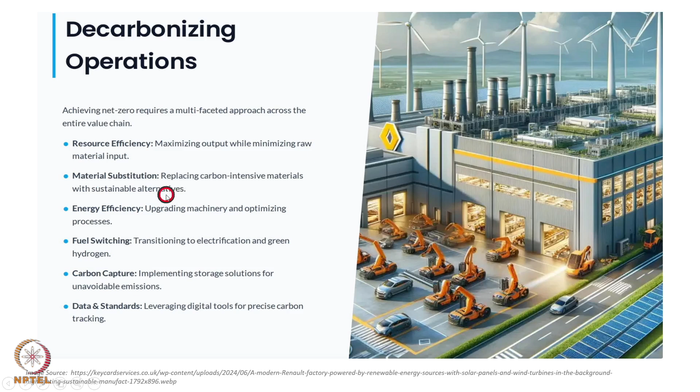While minimizing raw material input, material substitution means replacing carbon intensive material with sustainable alternatives, like we can see coal being replaced by sustainable alternatives like solar energy. Energy efficiency means upgrading machinery and optimizing processes. Machinery plays a very vital role - the configuration of the machine and the processes also play a vital role. So new concepts of machinery and optimizing the processes, sometimes we try to re-engineer the processes so that we can develop energy efficient processes.

Fuel switching is another very important aspect which companies are trying to implement - transition to electrification and green hydrogen, because as we know, electrification and green hydrogen kind of alternative fuels have the least impact on carbon footprints. Carbon capture - on the outlet of the fumes, there are technologies being developed to capture carbons, and then use these carbon captures for some other kind of processing. We can call this recycling of the carbon capture.

And data standards, leveraging digital tools for precise carbon tracking. So these are the kinds of opportunities in the industry, and any smart manufacturing industry is open to use these kinds of options or technologies to minimize carbon footprints, or to minimize the impact of carbonization due to their operations.

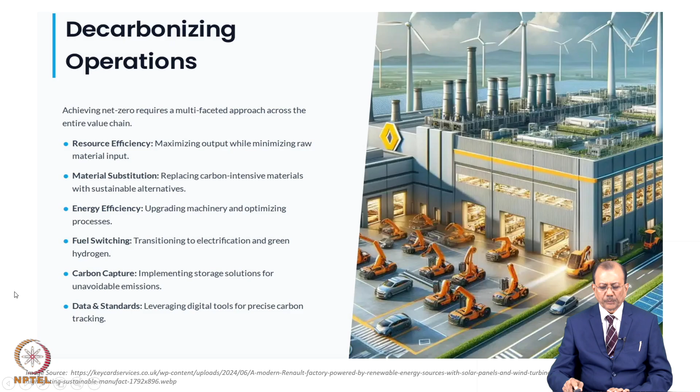Then we have opportunities in terms of challenges and opportunity regarding supply chain resilience. There is opportunity for end-to-end visibility of the supply chain, so that we know where there is a bottleneck. This is also one of the important aspects of smart manufacturing - the connected value chain of smart manufacturing, the supply chain and the logistics.

And the third and very important aspect is technologies, novel technologies, which we have deliberated in other sessions of this course, but we will have a focused discussion when we discuss smart manufacturing technologies. These smart manufacturing technologies are not different from Industry 4.0 technology. They are similar technologies, but their use is somewhat different in the context of smart factories or smart manufacturing.

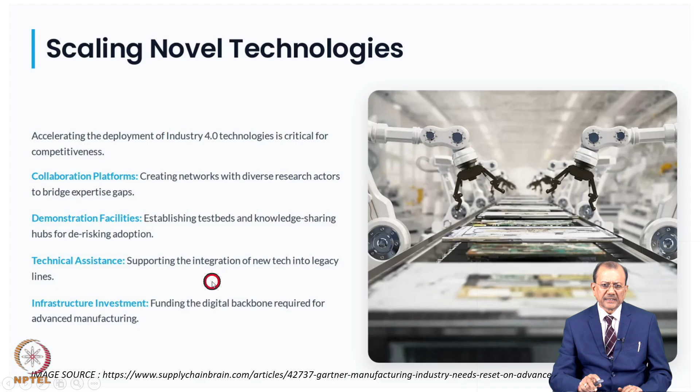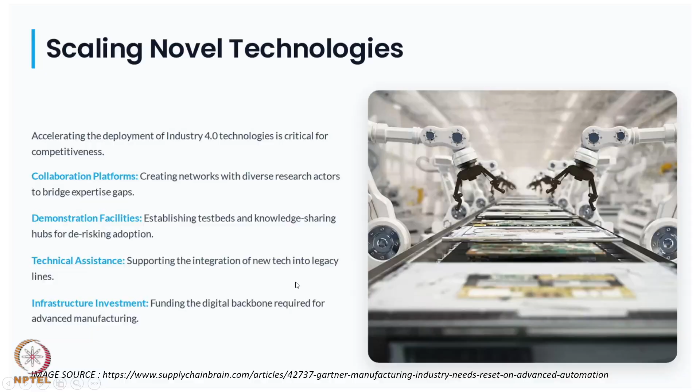Technical assistance: we should use new technologies into legacy lines, so technical assistance supports the integration of new technology into legacy lines. This we will explore in subsequent slides, I will be explaining this. Then infrastructure investment - these are the opportunities which are very much there in technology. So let us go deep down into the technology area, or technology opportunities, for smart manufacturing.

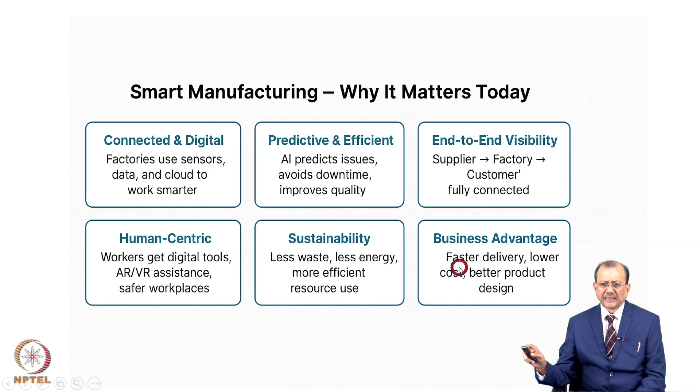This picture shows us the technologies commonly used in smart manufacturing industry: real-time data, AI analytics, connected machines, which we will discuss in the next session, automation and robotics, which we will again discuss in the next session, and digital twin, which we already discussed in the 5th session of the 5th week, showing how digital twins are used in industry. We will revisit in the next session how digital twins are used by smart manufacturers.

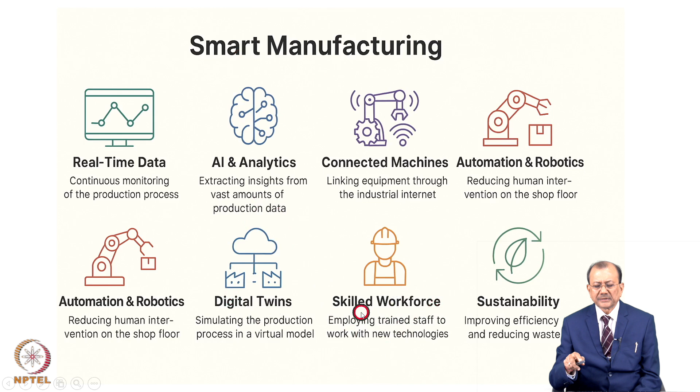Skilled workers - this is a very important area for the success of smart manufacturing, that continuous investment in workers to improve their skills, to upgrade their skills, so that they can perform in the new environment of AI, analytics, robotics, and sustainability.

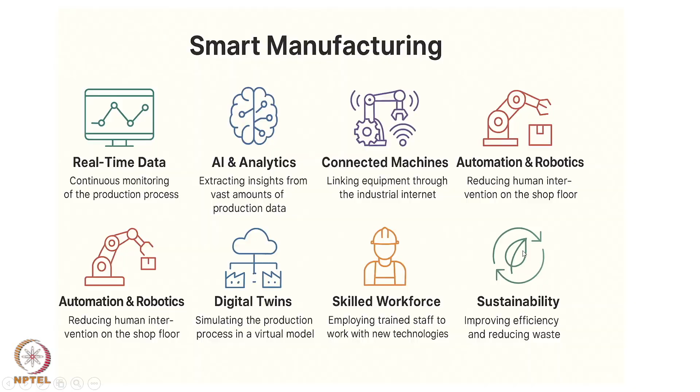So you should have a replica of your physical process. Suppose there is a machine or a furnace which is part of the factory, the replica of that furnace should be on the computer. Whatever event is happening in the furnace should be reflected on the image, available as a visual image on a real time basis on the computer. That is the meaning of the cyber physical system.

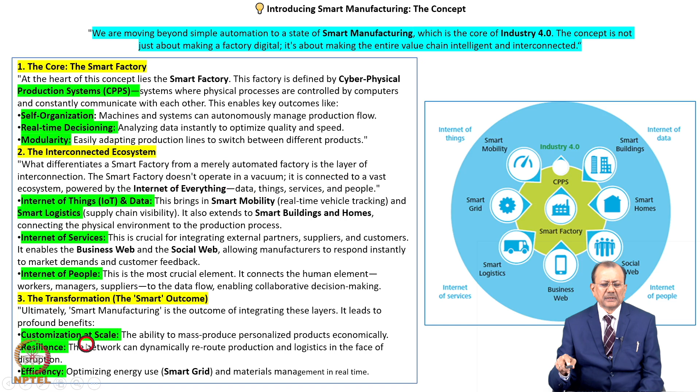That is what is called modularity - an interconnected ecosystem where you are connected through Internet of Things. So everything is connected in your ecosystem - data, all your equipments, and all the time people are connected to the factory. What is happening in this machine is called a connected environment. IoT we have also discussed about that. So all this is required for building smart manufacturing.

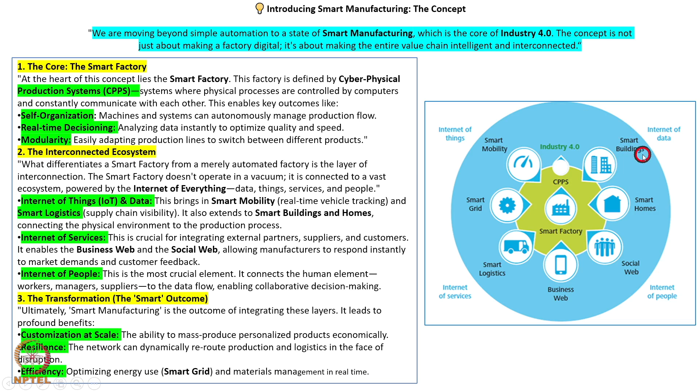On the right hand side you see different versions of smart mobility, smart buildings - they also work on similar principles which I am not going to elaborate over here. But if somebody says you are talking about smart manufacturing, what about buildings, what about logistics - the concepts we are discussing here are equally applicable to all these domains, like smart mobility, smart buildings, smart home, and so on.

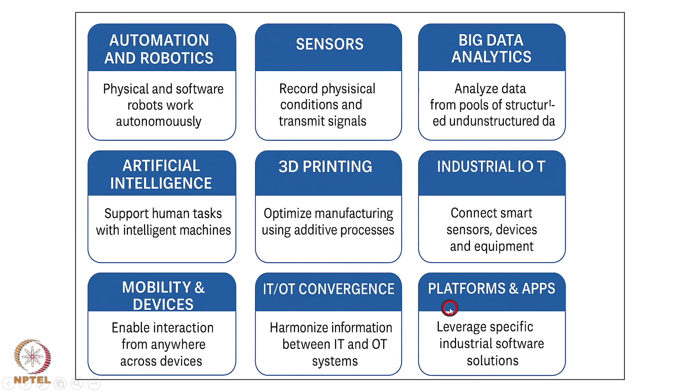So these are the technologies which are very important. The last thing I will say is that the platform and application leverage specific industrial solutions. This is something industry specific - suppose somebody is working in the steel industry or the power industry, for them the platform will be different. So you have to thoughtfully develop these platforms which will cater to the need of each industry. In fact, they act as a backbone for all these industry implementations, providing the backbone for running these technologies and interfacing them.

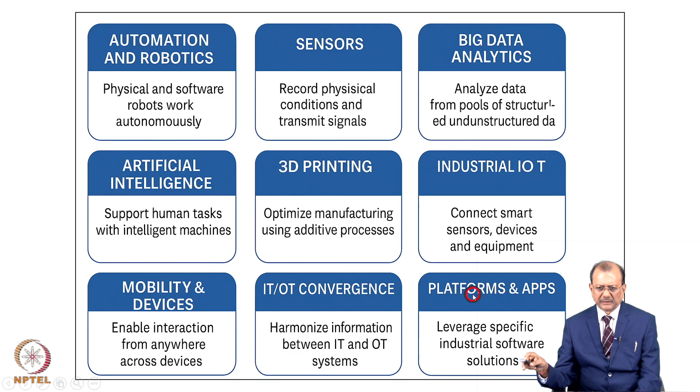I will be discussing the Tata Steel case study as part of this session, where you will see how they are using these platforms.

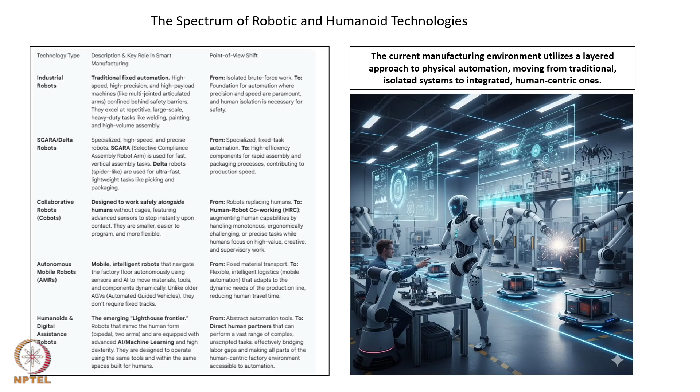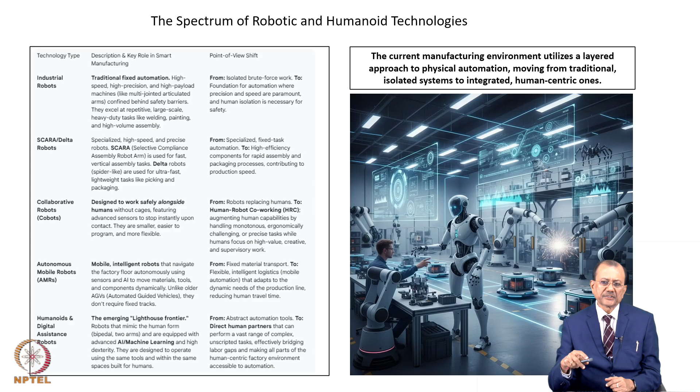I have shown here a big picture of robotics and humanoid technologies, which we will explain in the third session. But for the sake of completeness, smart manufacturing largely today is using humanoids instead of robots. 10 years back we had heavy use of robots, but now humanoids work for a specific task like a human, with precision, and they can work 24/7, unlike humans who are only allowed to work 8 or 10 hours - their capacity is not more than 10 hours, but robots can work 24/7. This is how industry is getting advantage of these technologies, which we will discuss in the third session.

So now I come back in the next 5 minutes to how Tata Steel is using this concept of smart manufacturing. 3 plants of Tata Steel have been recognized by the World Economic Forum as global lighthouses.

So you know about the global lighthouse, we have already discussed this in the 4th week. Tata Steel's success demonstrates that digital mastery requires vertical and horizontal digitalization, a standardization platform approach, and most probably a 3-stage commitment to people transformation. We will see how they have done this.

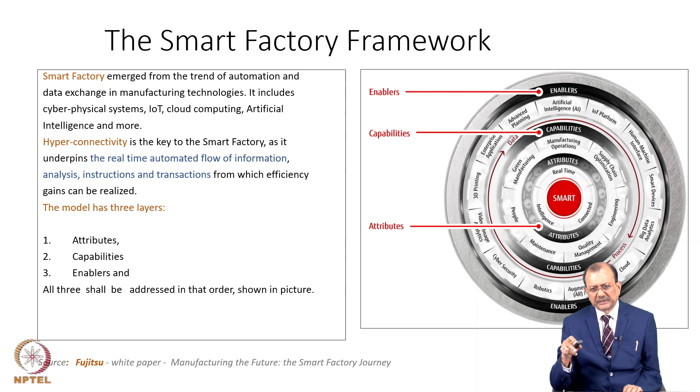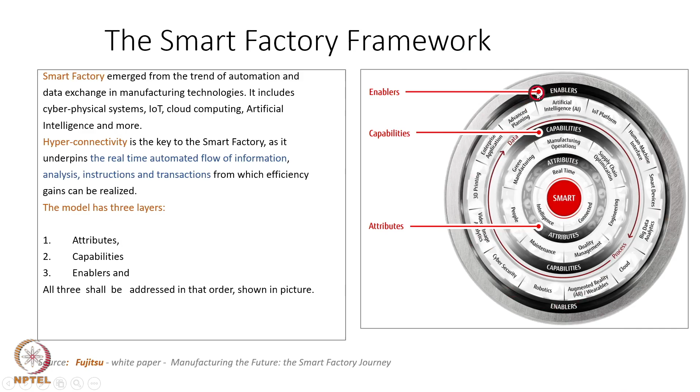So this is all I wanted to cover. Now I am presenting this slide for what we are going to discuss in the next session: what is a smart factory or smart manufacturing framework? It has basically three layers. One of the layers is called attributes, then we have to build the capabilities, and the third layer is the enablers. So now we are going to deliberate on all these three layers in the next session before we go ahead for any other discussion. Thank you very much.

I hope you would have understood this fundamental concept of smart manufacturing, and we will elaborate further in the next session. Thank you very much.